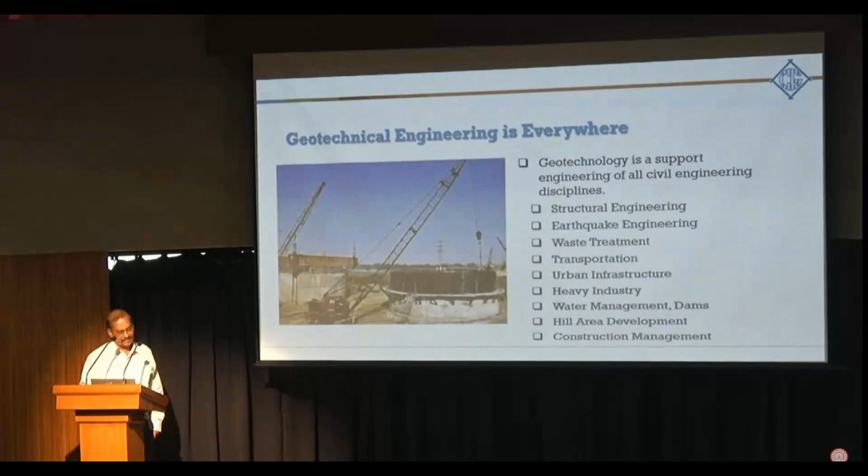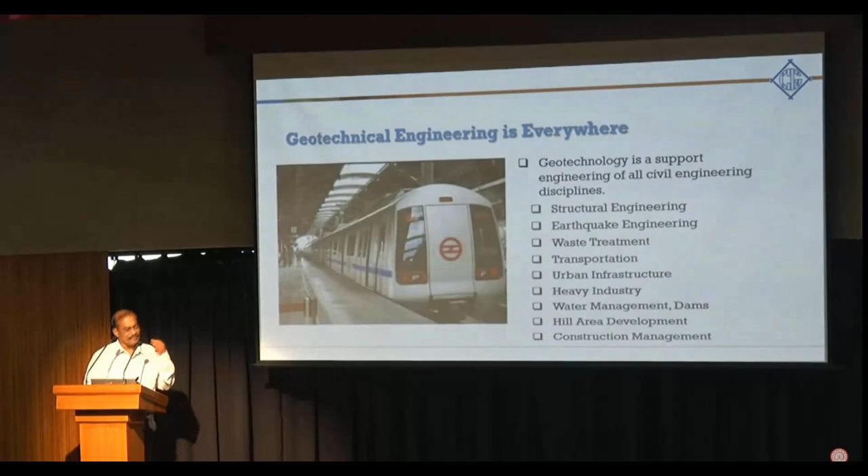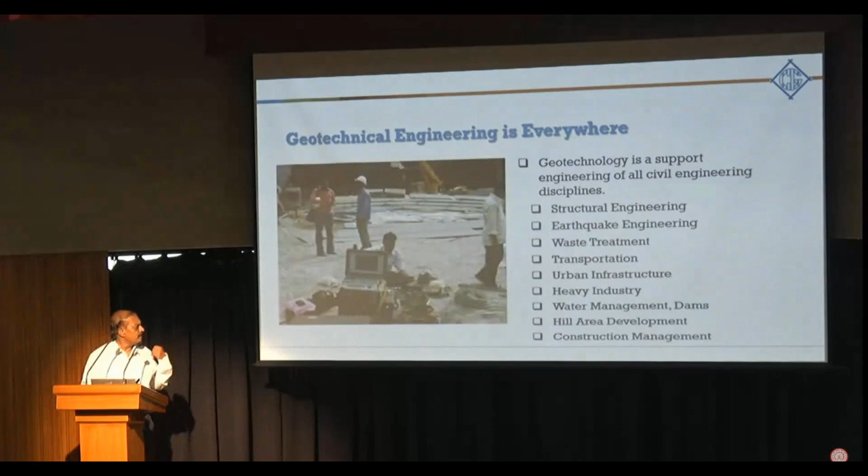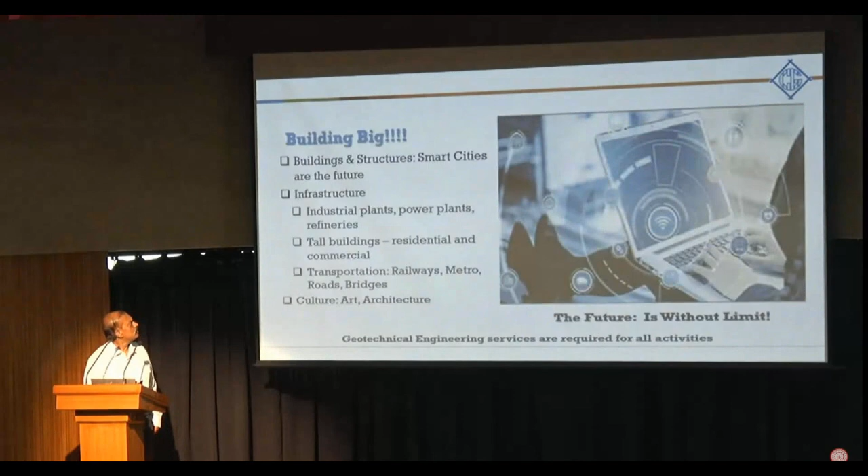So as you know, geotechnical engineering is everywhere, and it is the support discipline for all civil engineering disciplines. Whether you're talking about structural engineering, earthquake engineering, waste treatment, transportation, urban infrastructure, it could be heavy industry, water management, hill area development, everything requires geotechnical engineering. And you will see it in every facet of life. But today we are talking about building big. And when you want to build big, then geotechnical engineering becomes very important.

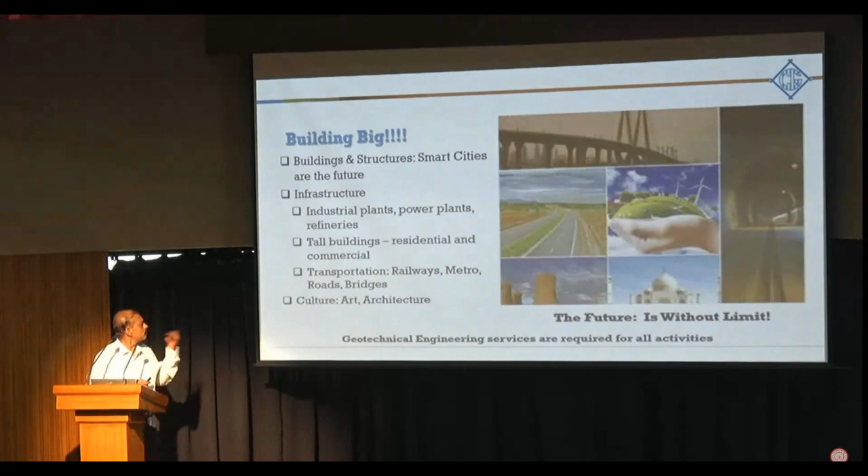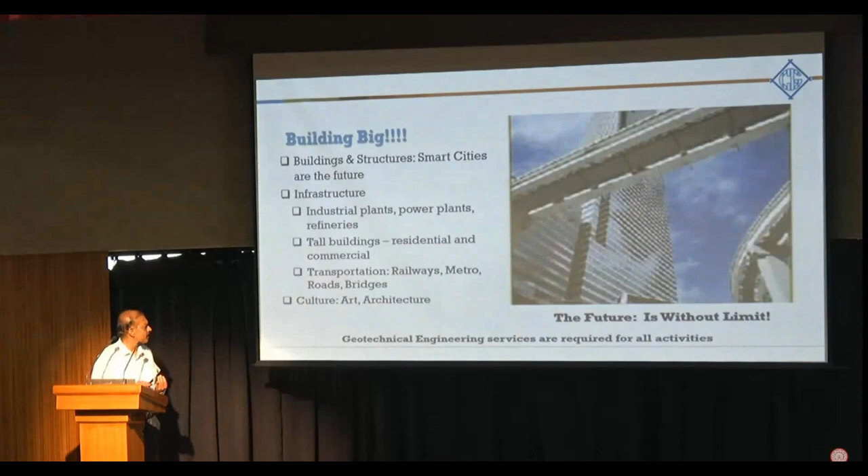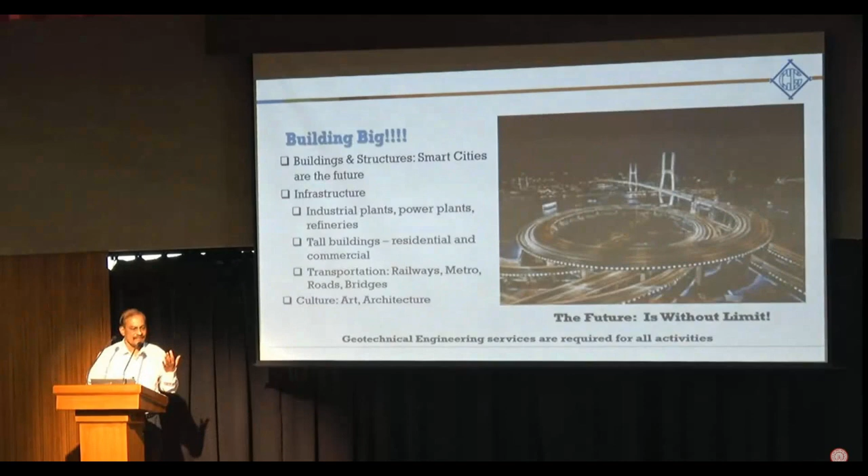So there is talk about smart cities. Infrastructure has gone to a new level, particularly industrial plants, power plants, refineries, tall buildings. We now don't bat an eyelid at 50 to 70, 80 story buildings, metro and railways and road bridges. Even culture, you have these huge tall statues coming up, all kinds of buildings, temples. So much activity is going on. And the future, I would say it is without any limits. So geotechnical engineering is the basic service for all kinds of activities.

So what kind of skills does the modern age geotechnical engineer have to possess? Obviously it has to be multidisciplinary skills. Considering geotechnical engineering as a subset of just civil engineering is no longer sufficient, because narrow perspectives could stifle progress, it can stifle innovation. So you have to widen your perspective, your understanding, interact with professionals of different disciplines, and link geotechnical engineering with other geosciences like geology, mining, environmental and earthquake engineering. That becomes very essential, and not just other geosciences, other engineering disciplines. Electrical, mechanical, chemical engineering, you have to understand these to understand the tolerances of various machines, environmental impact.

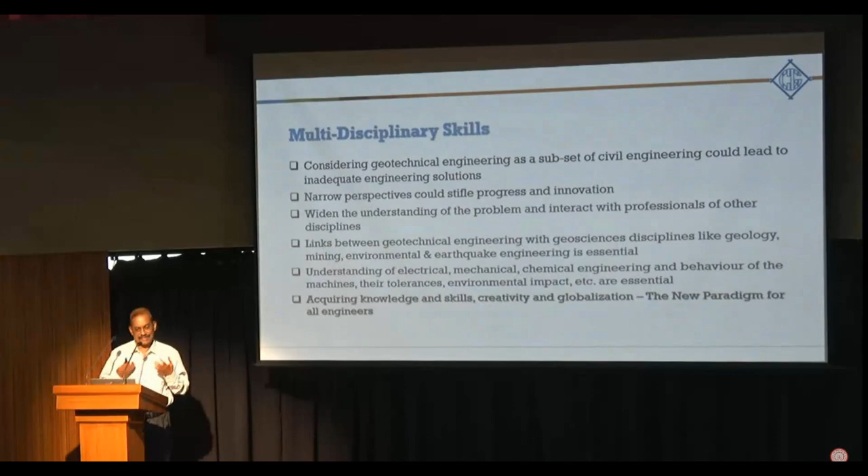In fact, when we were working on the Ram temple, we had to understand some of the religious requirements of the temple to be able to do the geotechnical engineering right. For example, they said that you cannot use steel in the structure. But you know, modern civil engineering is about reinforced concrete. And if you can't use steel, then the whole thinking has to change. So you have to acquire that kind of knowledge and skills for globalization. So that is the new paradigm for all engineers today.

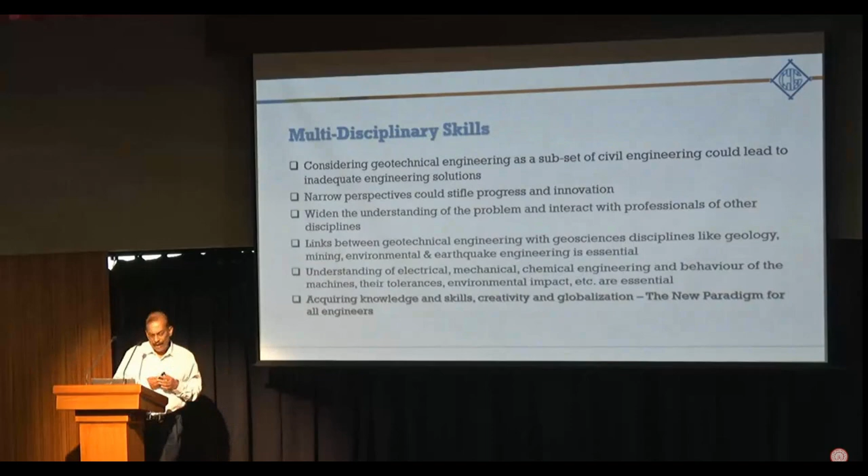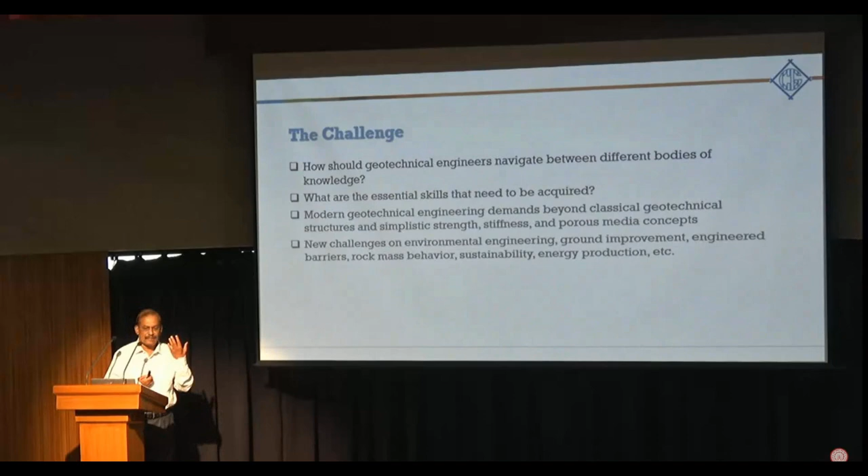The challenge, of course, is how to navigate between these different bodies of knowledge. What are the skills that you need to acquire? So we have to go beyond the classical geotechnical engineering, the classical simplistic concepts, and take on new challenges. Environmental engineering, ground improvement, engineered barriers, rock mass behavior, sustainability, energy production. We are doing so much work on renewable energy and projects like solar energy and wind energy. The geotechnical requirements are very much different from what we are used to.

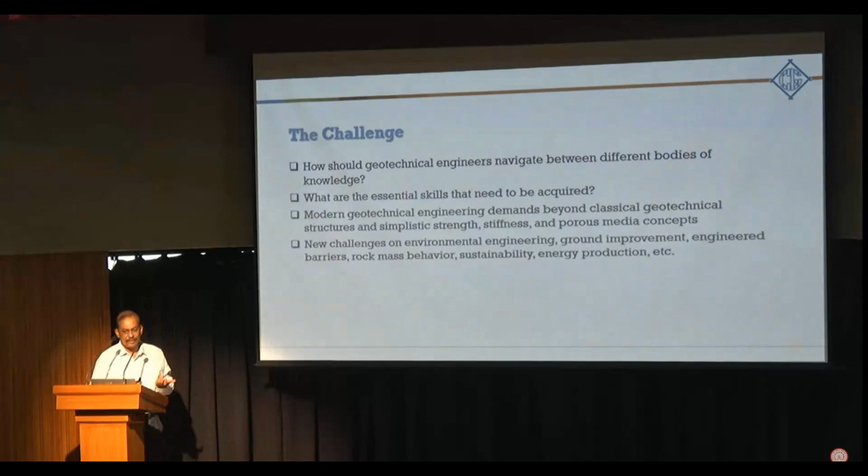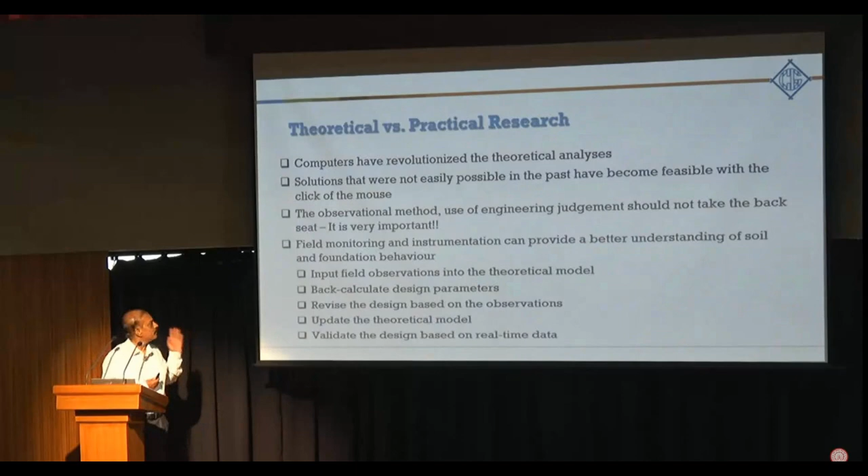And of course, when you talk about theoretical versus practical research, that has been the topic of discussion here. Computers, of course, have revolutionized theory, and solutions which were not easily possible, you can get with the click of the mouse. But as Professor said, the observational method, use of engineering judgment should not take a back seat. It is very important. Field monitoring and instrumentation, that's what will provide your understanding of soil behavior. So input the field observations into the theoretical model, and then you develop your solution by back calculating the design parameters and revise the design based on the observations. So then you can validate your design based on real-time data.

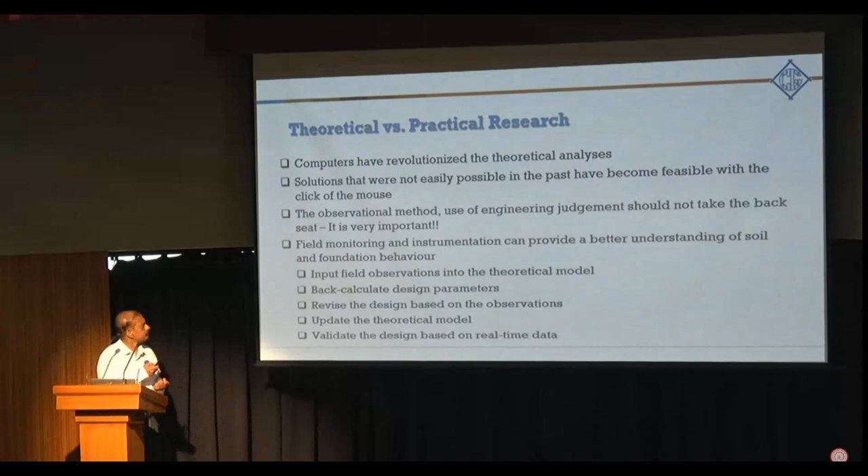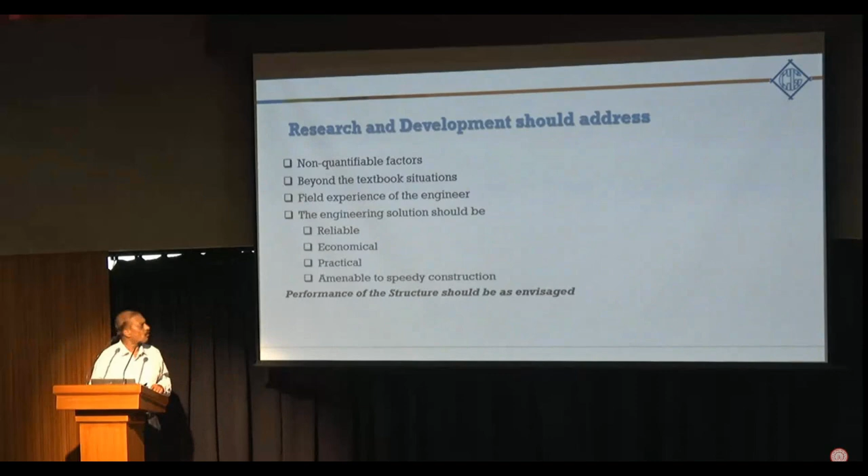So research and development should address non-quantifiable factors, something you cannot put a number to. And of course, the field experience of the engineer becomes most important. So your engineering solution has to be reliable, economical, and practical, but most important, it has to be amenable to speedy construction so that the performance of the structure is as designed.

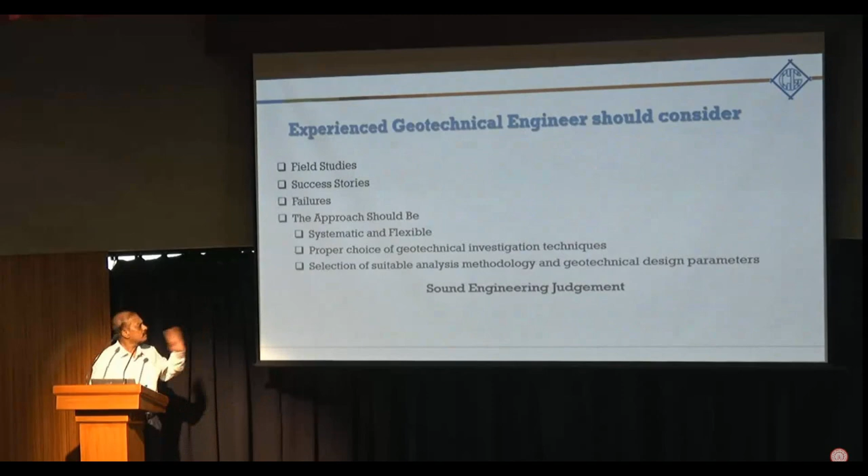So now we talk about experience. The experienced geotechnical engineer would consider field studies, success stories, and failures. Failures are more important than success stories in trying to figure out how to solve a particular problem. So you have to be flexible yet systematic, have the proper choice of investigation techniques, and then select your suitable analysis methodology. Most important, sound engineering judgment.

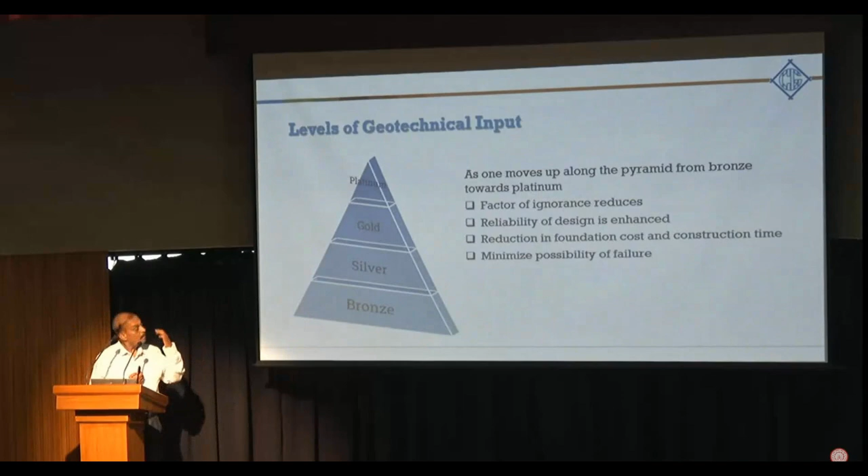So when we are talking about having the right kind of geotechnical data, I like this geotechnical input pyramid from bronze, silver, gold, and platinum. As you move up this pyramid, your factor of ignorance reduces. I don't look that much at the factor of safety; the factor of ignorance has to reduce. Your reliability of the design has to be enhanced so that you can reduce the cost of the foundation and the construction time, but yet minimize the possibility of failure.

So if you look at a geotechnical investigation, moving from a bronze level to a platinum level, the investigation would be a very limited investigation here, but as you go towards the gold and platinum levels, you have a lot of boreholes, in situ tests, advanced laboratory testing, and all that. And here, the geotechnical engineer in a gold or platinum level would be an experienced expert. Design parameters at a bronze level are guessed, whereas here you have site-specific design parameters.

So the analysis is almost none at the bronze level, it's just throwing some numbers, up to advanced numerical modeling. Design rules are also thumb rules, versus optimized serviceability criteria. The foundations, of course, if you have a gold or platinum level, are optimized, practical, easy to build, and save not just money but also time.

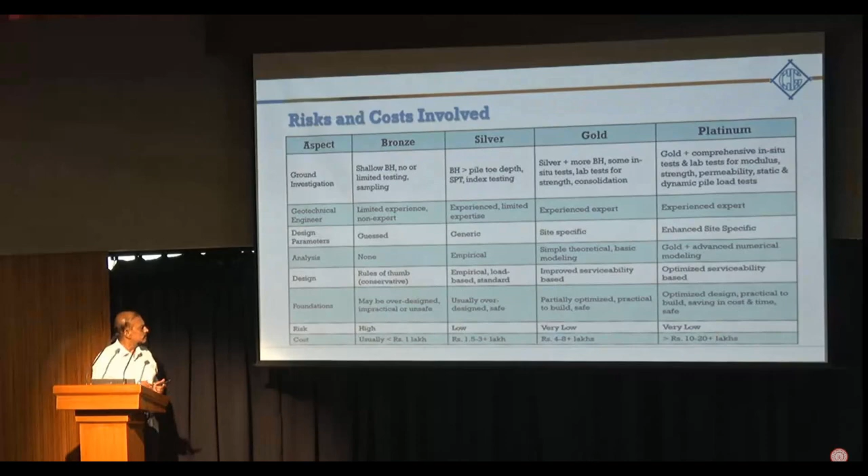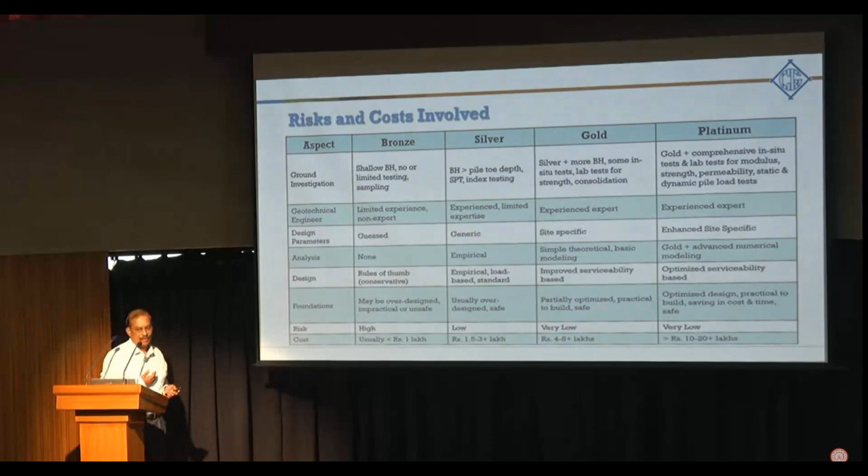Risk level goes down here, but the cost of the investigation, of course, would be much higher if you were doing a gold or platinum level investigation. But you always spend a little bit more money, and what you save on the foundation cost and time is much more. So what I would advise is that you move towards gold and platinum levels of investigation.

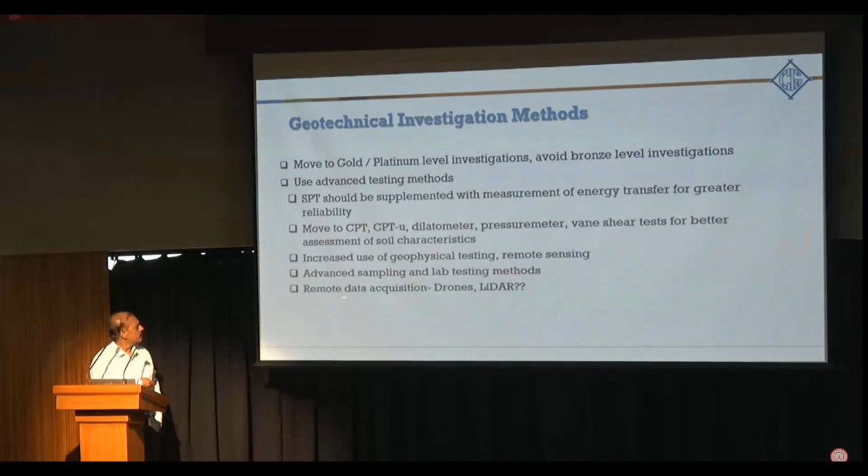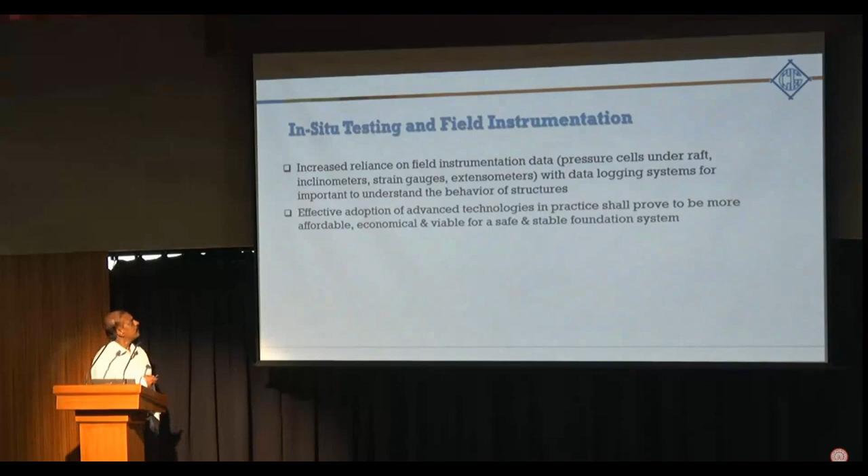Now, if you are doing SPT, let's measure the energy transfer for greater reliability. Move on to CPT, CPTU, dilatometer, pressuremeter, vane shear tests for better assessment of the soil characteristics. Use geophysical testing, advanced sampling and laboratory testing methods, remote data acquisition. So all that is coming now. In situ testing is the most important thing: if you have field instrumentation and in situ tests, you can have a better understanding of the behavior and effective adoption of advanced technologies. You will be able to get better solutions.

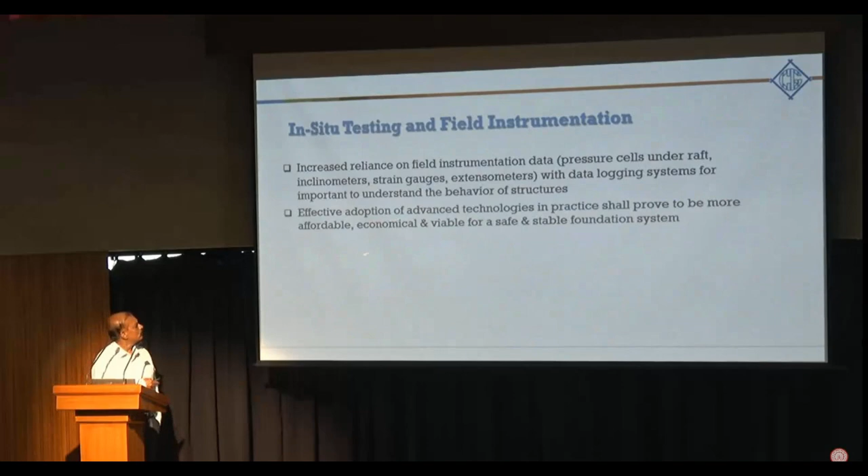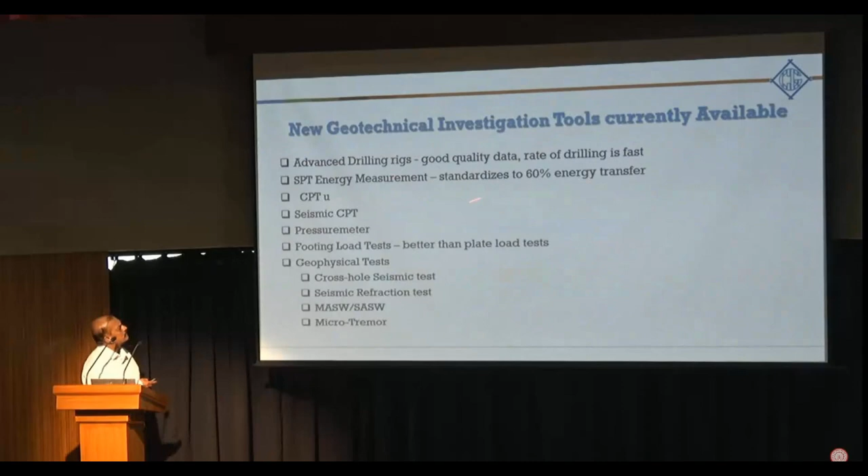So what kind of new techniques are available? You have very good drilling rigs available. SPT energy measurement standardizes to 60% energy transfer, so you are able to correct the uncertainty in the SPT measurement. There is the CPTU, seismic CPT, pressuremeter, footing load test, much better than the plate load test. Geophysical tests; there are a whole lot of tests available nowadays which can be very useful for your design.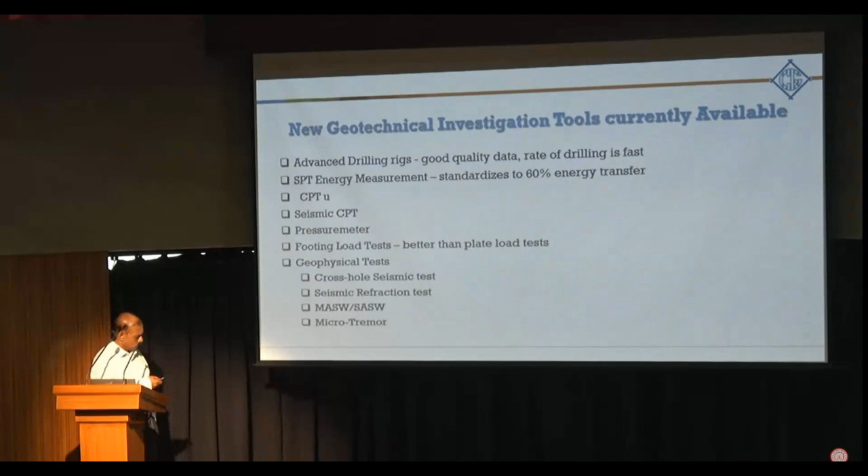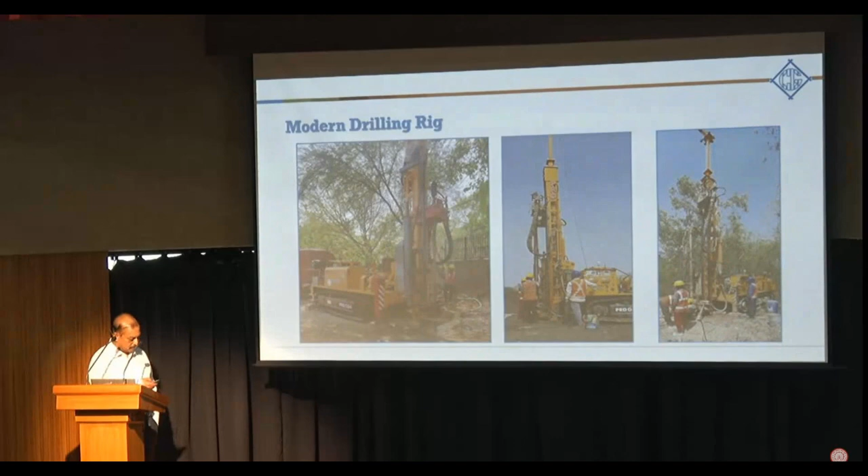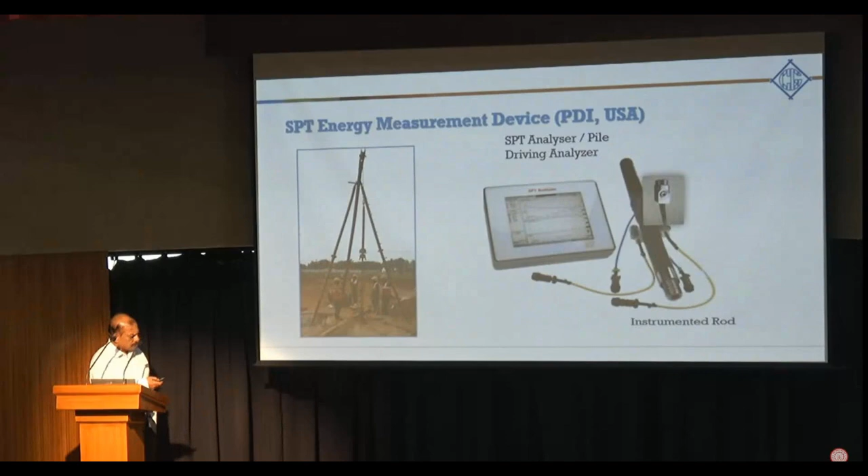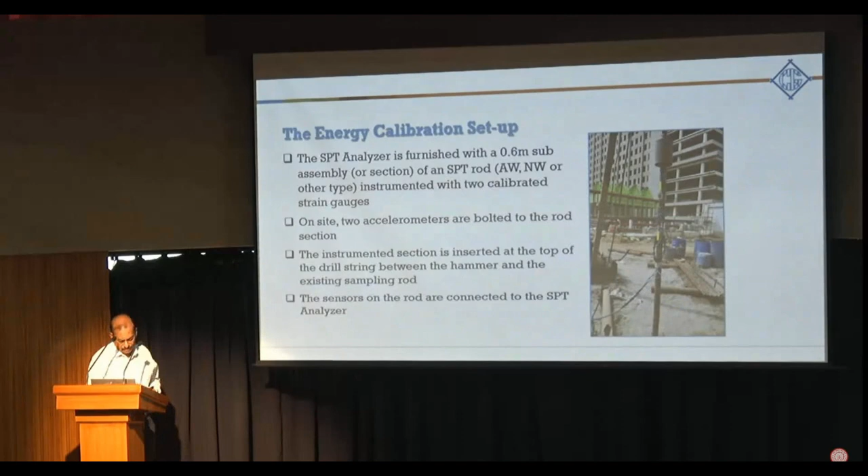So here are some drilling rigs. These kinds of drilling rigs can increase your productivity on sites, much faster, and get you better quality samples. SPT energy measurement: you have an instrumented rod here, which is inserted here. This is an auto trip hammer. So you measure your energy transfer. This is, as I told you, a 0.6 meter rod with instrumentation. Two accelerometers are bolted, and you also have strain gauges to measure the stresses. So you can then measure this SPT energy transfer.

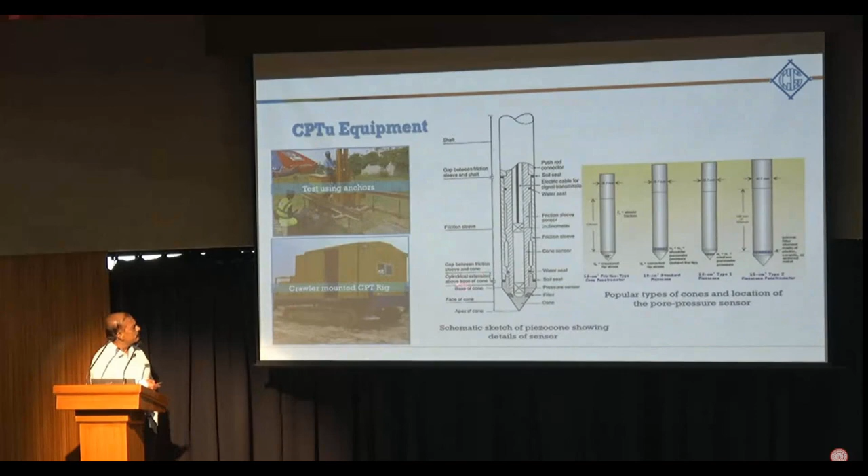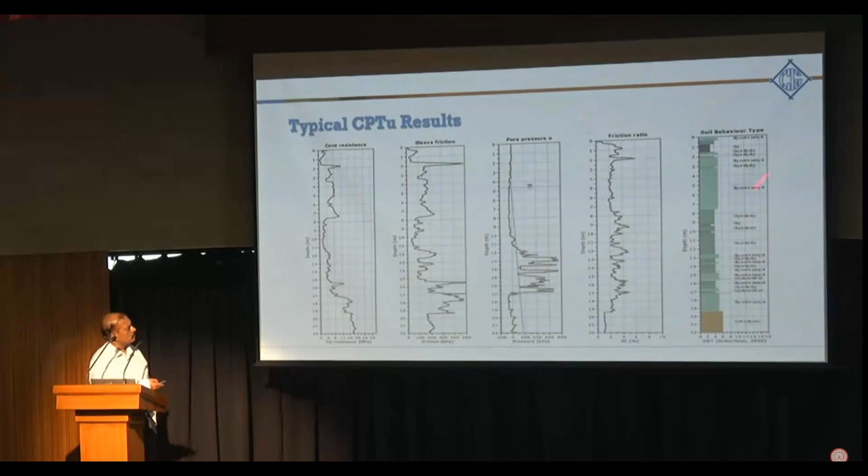CPTU is now very common. Here, this is a crawler-mounted CPT rig. This uses anchors. In the CPTU, you also have a pore pressure measuring sensor. So these are the kinds of cones which are being used. Typical CPTU results: you can get a very good idea of the soil type also. The pore water pressure is being measured here.

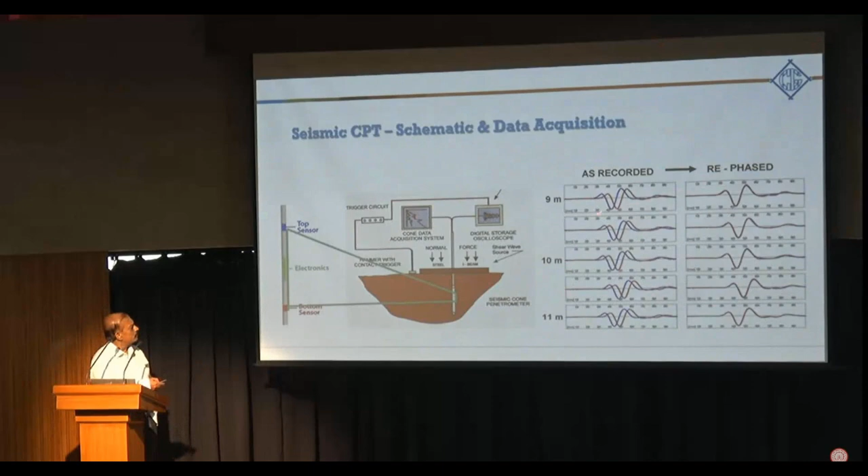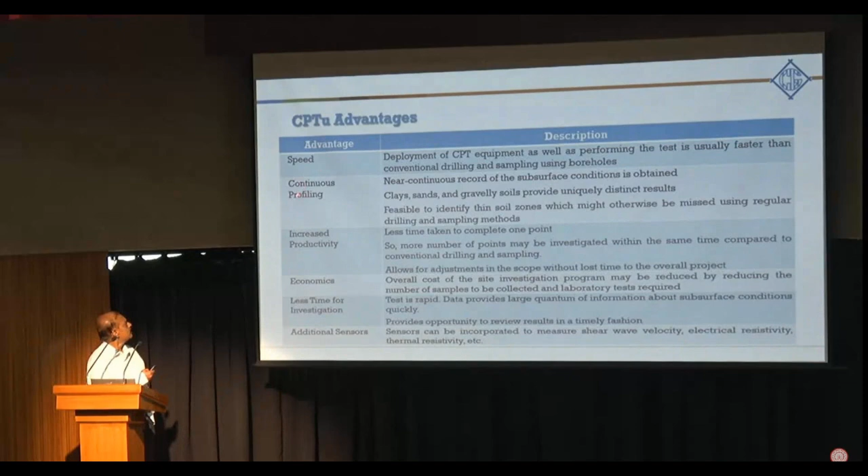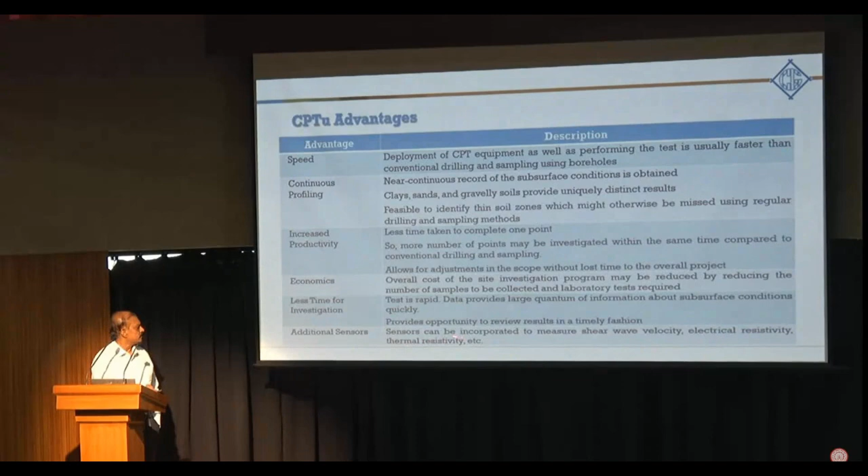So I won't go into all the details of the advantages, but you can see speed, continuous profiling, increased productivity, a lot of saving in time as well as cost. Of course, additional sensors to measure shear wave velocity, electrical resistivity, thermal resistivity, all that is possible. You get a large volume of data.

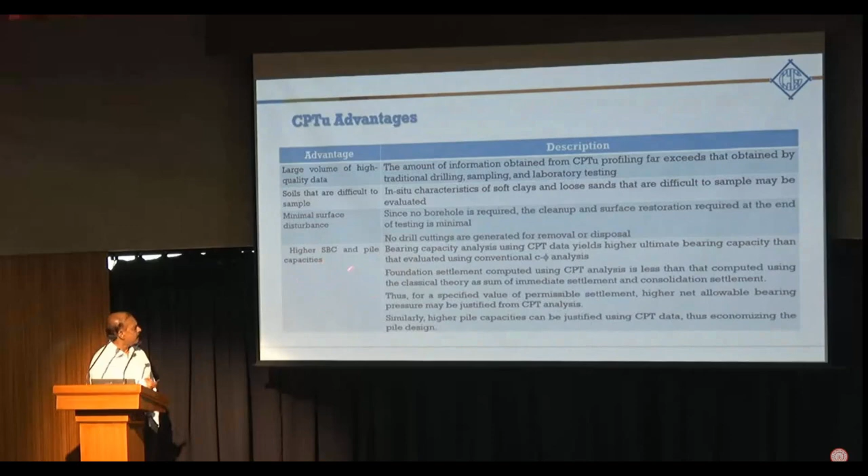Soils that are difficult to sample, you can get good data from there. So instead of trying to collect undisturbed samples of loose sand or soft clays, CPT can give you the data. Minimal surface disturbance because you are not having any drill cuttings generated. Higher bearing capacities and pile capacities can be justified by the CPT.

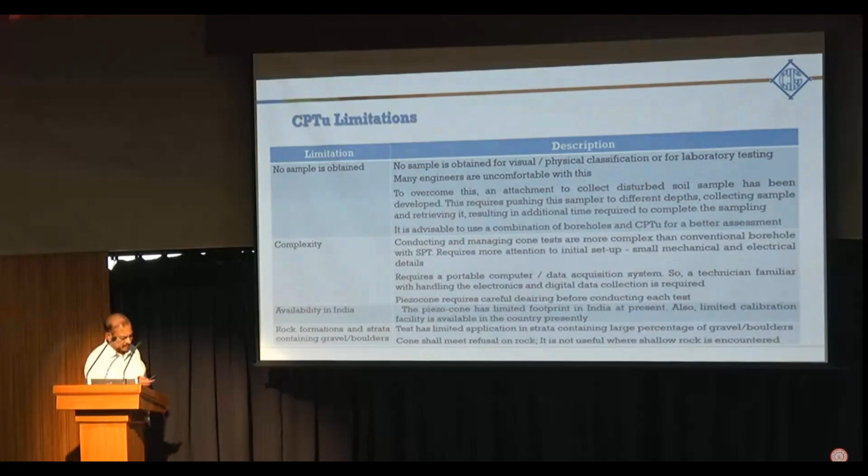Of course, every test has its limitations, one of them being that no sample is obtained. It's a little complex because the field technician who goes to the site needs to understand how to operate a computer. Availability in India is still limited. Of course, rock and strata containing boulders, you cannot use CPT.

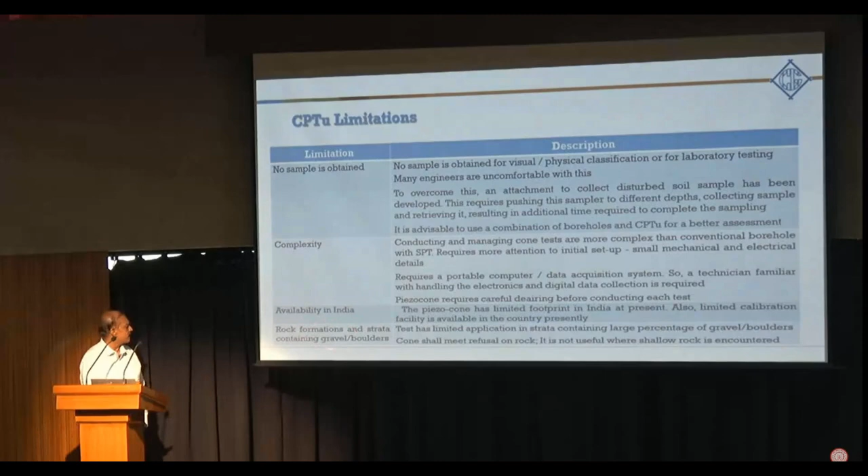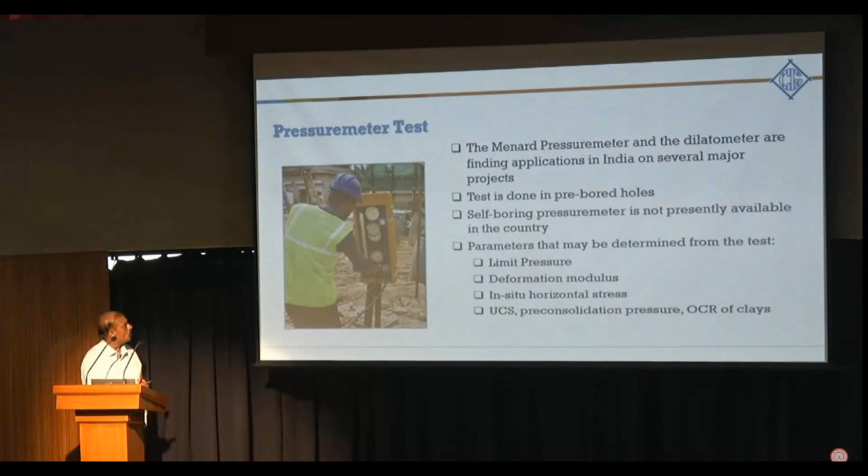Come to the pressure meter, the dilatometer, all this is being done today. The Menard pressure meter, you see the photograph here. So this is done in pre-bored holes. So you get all these parameters from the test. This is the pressure meter test in progress.

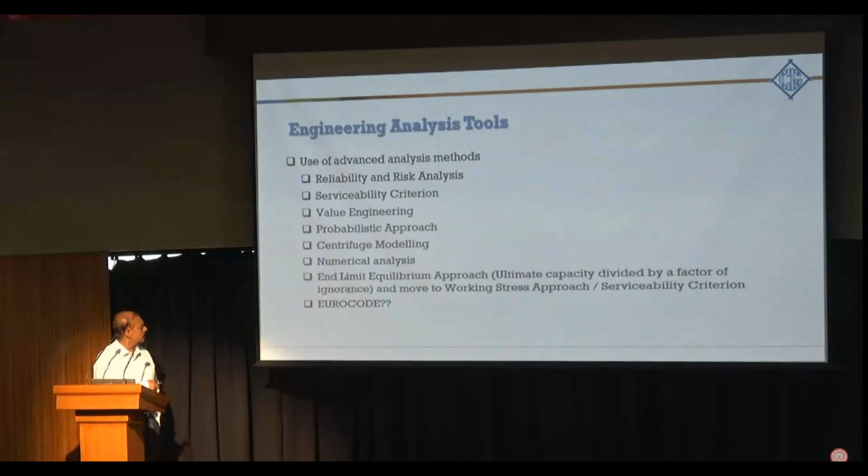Engineering analysis, of course, advanced analysis, reliability and risk assessment, value engineering, using a probabilistic approach. Centrifuge modeling is also being done nowadays. Of course, numerical analysis is very popular. Let's try to move towards advanced analysis too. But most important thing in engineering analysis tools is your engineering judgment. The pet cliche being used by many people, geotechnical engineering is a science, but it's practice and art. So what is that art here?

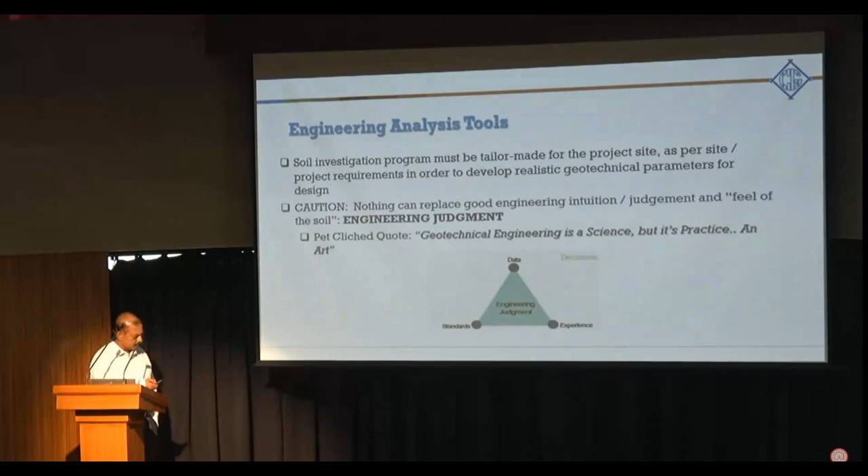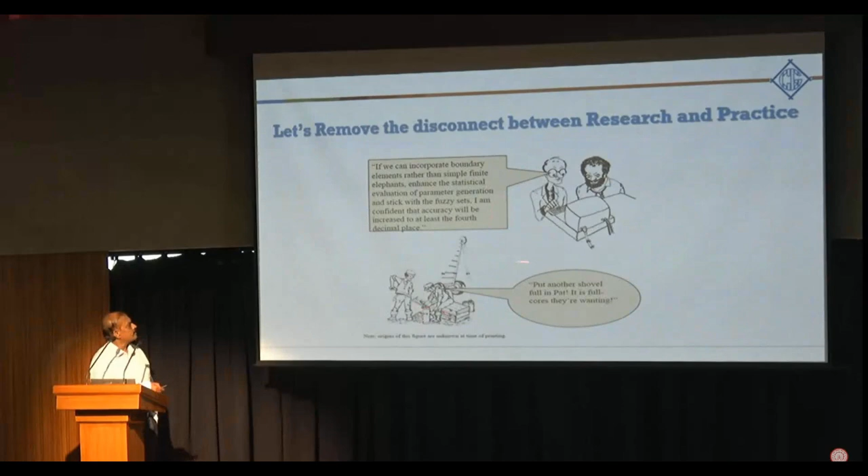So you have data. You must have good quality data to be able to take your decisions. You have referred to standards, technical specifications to be able to interpret the data. You should have that kind of right experience to use all this for an engineering judgment so that you can take the right decisions. So most important, of course, is to remove the disconnect between research and practice. That has been the discussion. So if this is the kind of samples that are being collected on the site, then all kinds of advanced finite element analysis is useless.

So I'll talk a little bit more about engineering judgment. So the judgment has to be based on knowledge and experience of that engineer to be able to provide a reasonable solution. So years of experience and resources are available. You may be able to make a judicious situation, but of course one shoe does not fit all. So you have to be able to understand this concept of how the way it has to flow. You analyze the data, you make the predictions, and you should be able to take the right decisions so that you have a successful project. You should be ready to go beyond the codal provisions and out of the textbook situations to be able to work out the right kind of a solution.

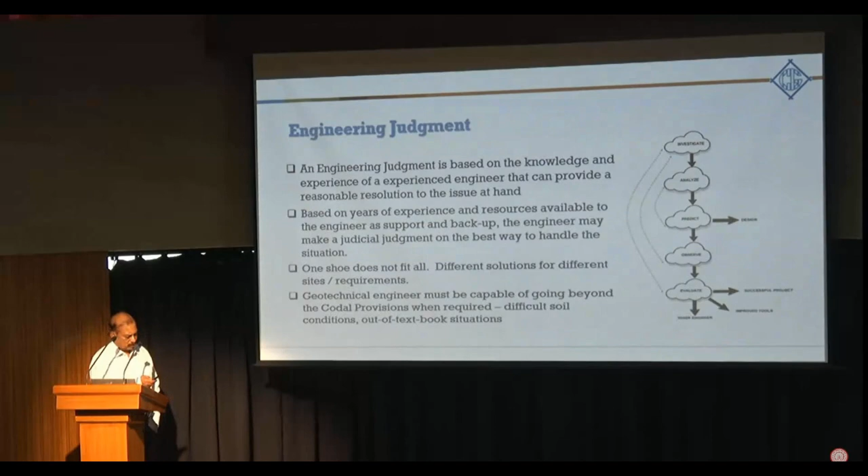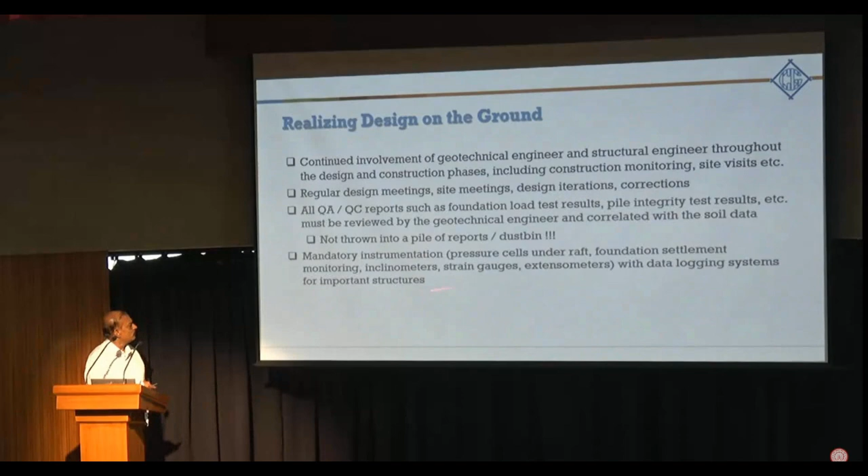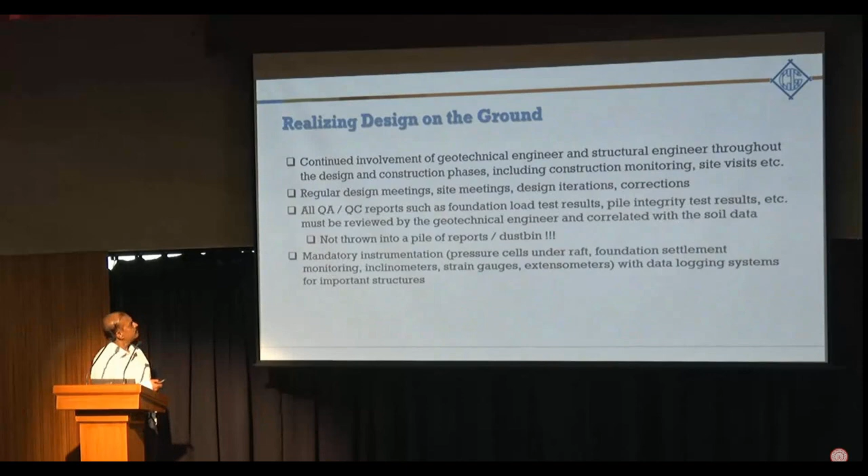So to be able to realize this on the ground, the geotechnical engineer has to be involved throughout the project, including the construction monitoring, site visits, etc. Regular design meetings, site meetings, design iterations, all QA/QC reports, foundation load tests, pile integrity tests, etc. must be reviewed by the geotechnical engineer. Just don't throw that pile of reports in the dustbin, use it. So mandatory instrumentation with proper data logging for important structures. This is now being talked about in the country, but not yet very effectively implemented. But what I'd like to show you, if this is the quality of piles, no matter how conservative your design is, the pile is never going to behave as you design it.

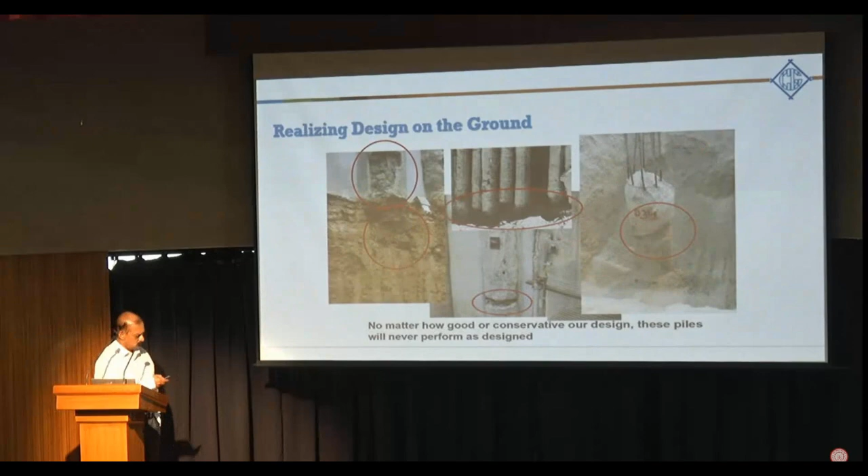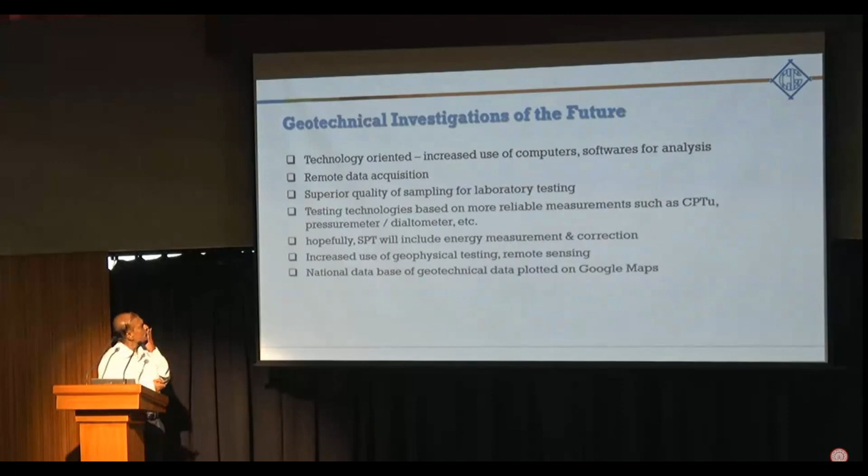So let's talk about the future. Investigations of the future have to be technology oriented, increased use of computers and softwares, remote data acquisition, superior quality of sampling and laboratory testing technologies that are more reliable, CPT, pressure meter, dilatometer. Hopefully SPT will die its natural death, but as long as SPT is alive, please measure the energy transfer. Geophysical and remote sensing is important, and also a national database of geotechnical data. Hong Kong already has it, but Hong Kong is a very small country. If we can have something like that, then we should be able to get a little bit more understanding of the geotechnical properties of the soils and rock in India.

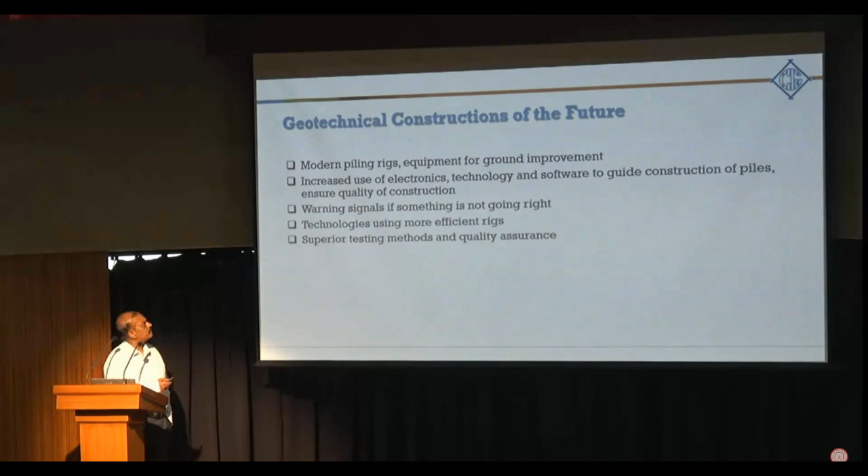When we talk about geotechnical constructions of the future, we're talking of modern piling rigs and big rigs for ground improvement. Of course, use of electronics, technology, and software to guide construction of piles. Warning signals if something is not going right. Technologies using more efficient rigs, and superior testing methods and quality assurance. So that's what we should see in the future, hopefully. With that, I close this presentation.